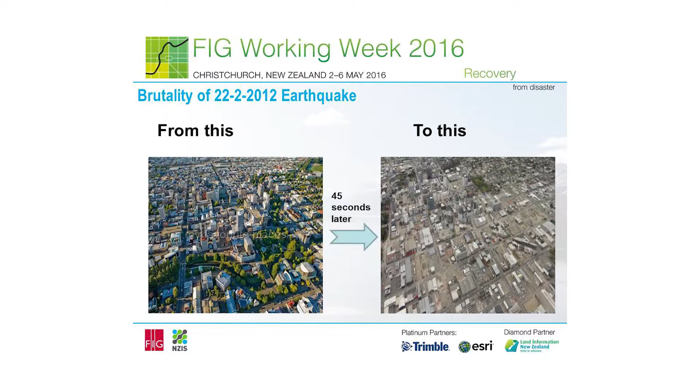So what happened to the services? Working through them in order of importance - water supply pipes. So the map up there, the red dots there illustrate the number of breaks that were recorded around the city immediately after the February 22nd earthquake. We had about 30,000 homes without water supply, which is about 60,000 people the day after the earthquake. So that puts an immediate huge amount of pressure on the response teams, one, to bring back resources, but also to get emergency water supplies out to the public. And that bottom right-hand photo there, you can see some of the queues.

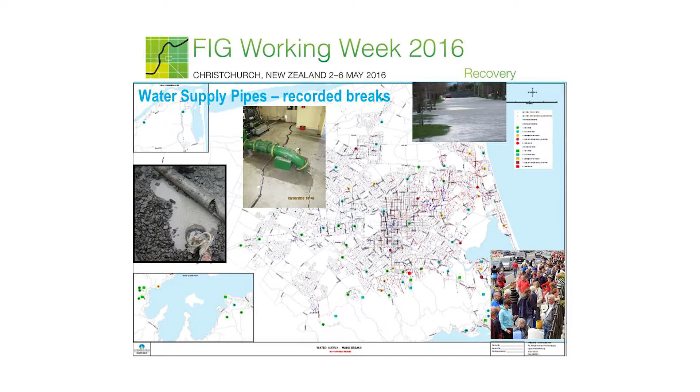Of course, when you have that much damage to the water supply and you've got that much damage to the wastewater supply, you've got big public health risk issues as well. Christchurch is quite unique that its water supply comes from under the ground and it's untreated, and we don't chlorinate, so that's an elevated risk in terms of public health in these conditions. We put immediate water restrictions in place. Not that people were thinking much about watering their gardens, but that was an immediate initiative. And we also looked at bringing a desalination plant in from Australia, particularly the east side of the city. The pressures over here got very low, very close to zero, and we lost some key infrastructure over here. So we looked at, we set up a desalination plant on the beach there as an emergency precaution.

On the wastewater network, damage was worse. Basically, almost half the city had very poor flows in the wastewater network. And this was complicated further because a lot of those areas were in liquefiable soils, and the older pipes pulled apart or cracked, and they filled with liquefaction material - silty type stuff, so you're getting this sort of debris in the pipes. It was very difficult to even tell whether the sewers were flowing or not, so you can't assess the pipe network until you get that stuff out. So one of the first actions was to look at how we were going to get some sort of sanitary service back to about 40,000 homes in the city.

It was interesting that many of the older people in the city were familiar with regimes from the Second World War, like using your garden and digging your own latrines. So there was all sorts of helpful advice coming in during those early response periods.

The city brought in about 2,500 portaloos, distributed into high need areas, but that's not going to service 40,000 homes very well. There are social consequences with these outdoor emergency responses. From the September earthquake we'd had response from social services that kids didn't like, and women didn't like using these at night. You see the best and the worst of humankind during these events, and also portaloos can be a disease transmission path because so many people use them.

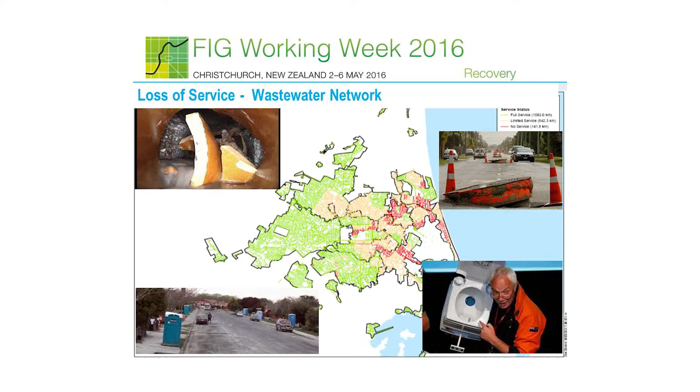So we needed a different type of solution. We ordered 40,000 chemical toilets the day after the earthquake, and 250 storage tanks, and set up a temporary network on the east side of the city. I might add, the mayor there, that's not one that's being used - he wasn't brave enough to do that.

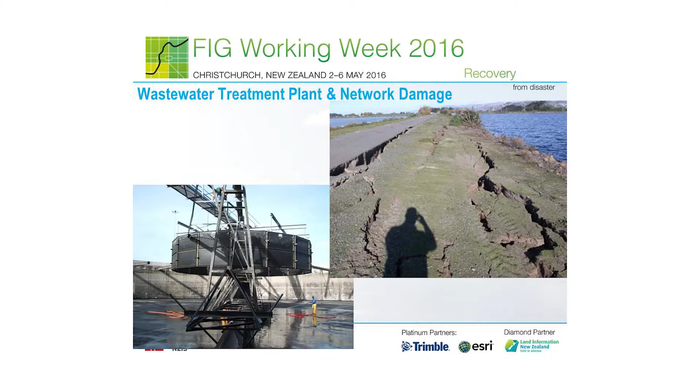The wastewater treatment plant - Greg will talk more about this later - suffered significant damage. It did keep running throughout the earthquakes, though not all processes were running, and that was a godsend for the city. The city had built an ocean outfall discharge which discharged 3 kilometres off the shore, and that came into service just before the earthquakes.

So any wastewater that actually got to the plant was being discharged 3 kilometres off the coast, which helped support public health initiatives to prevent disease transmission. Greg will talk a little bit about the individual damage on the plant.

Wastewater overflows - there are two big spikes here. February 22nd was when the main quake came through, and then we had one a bit smaller in June of the same year. The day after the earthquake, we had next to no wastewater getting to the treatment plant, because of damage to major terminal pump stations.

As soon as they started to come back on, the overflows reduced. But it really took until about October 2012 before we got the wastewater overflow discharges into the environment under control. That was a major achievement in the response and early recovery for the city, because coming into summer it enabled the waterways to be used again for recreational purposes, both the beaches and the rivers.

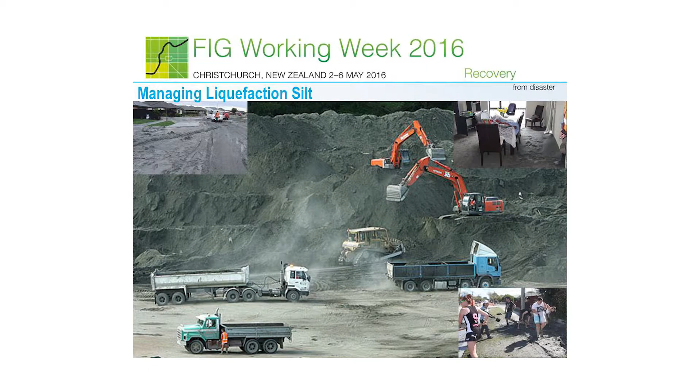That made getting around the city a lot more difficult. It's fair to say that driver behaviour deteriorated significantly after the earthquakes. People are stressed, they're tired, and you've got this ongoing shaking going on, so driver behaviour became quite a health and safety risk for the repair crews, both in setting up traffic management and working in that environment.

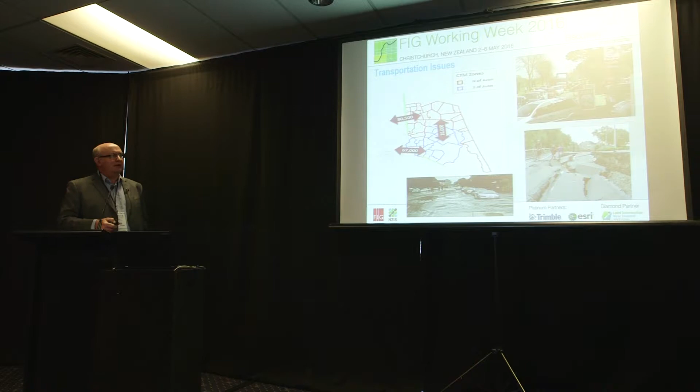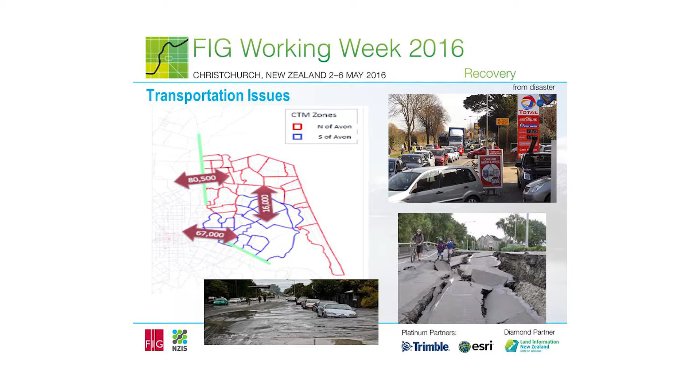So this is the diagram - there's some modelling that the Rebuild Alliance did. We had a lot of damage on a lot of the bridges, some minor, some significant. Some bridges were almost rebuilt. You can't just take down a whole series of bridges in the city at once, so a whole lot of traffic modelling had to be done to assess the impacts of one-laning bridges for repairs, or taking bridges out of service at any time, to see what effect that was going to have on the whole city.

The earthquake - the government red zoned, and by red zone, the government looked at the damaged ground and said, okay, it's not economic to rebuild on this ground. It just needs too much ground improvement work. We're not satisfied that the ground improvement work will give a stable enough solution for people to rebuild on and to put infrastructure back in.

So they bought up about 10,000 properties in the city, and when you translate that to 10,000 families, you've got to put them somewhere. Whilst the city had an urban development strategy that was quite well formed with growth areas marked, the infrastructure wasn't immediately available to those. So at the same time we're trying to respond and recover, we also have to be thinking about where we're going to accelerate infrastructure development to enable new sections to be available for people to build on. This puts a lot of financial pressure on local and central government organisations.

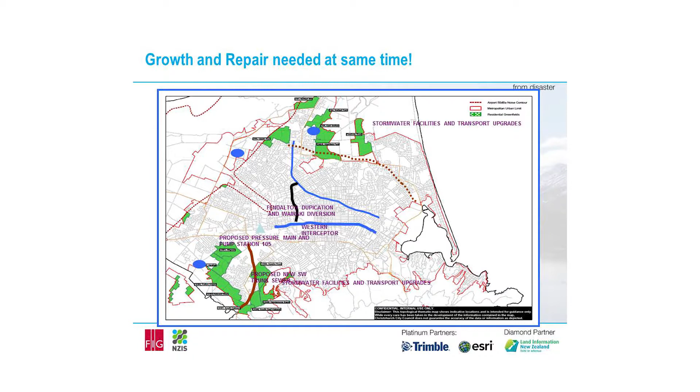During this initial phase, you get swamped with analysts from all sorts of directions giving good advice. Sometimes working remotely and doing desktop calculations isn't terribly helpful to a response and recovery event. So there were some absurd figures that came out with regard to the number of houses that had to be built, the number of people we needed in the city, and it creates a lot of hysteria that was unnecessary. The reality is these things sort of self-determine their own movement, and the commercial parties respond quite strongly to them.

Having some areas already set aside for urban development, with infrastructure plans in place to service them, those areas filled up quite quickly. The emergency areas that the government accelerated approvals through, a lot of those aren't taking off at all, simply because it was 10,000 families having to relocate, not half the city. You don't need to make provision for 50,000 homes if you've only got 10,000 plus normal growth on top of that. So the city, since that period, has been able to slow some of the initial infrastructure investment required, which has been helpful for its finances.

So Duncan Gibb, I think, was a keynote speaker. I worked quite closely with Duncan during the early stages of the recovery, and he would have talked about the alliance infrastructure model that was put in place.

After the February earthquake - so after the September earthquake, the damage estimate across the infrastructure was about 400 million, and the repair at that phase was felt that could be handled through more traditional contracting models, like design and construction type models under a program management framework. That was set up and starting to operate when February hit. When the repair bill went from 400 million to 3.2 billion, there was a realisation that we actually needed to bring the civil engineering and design resources of New Zealand together into one organisation to make that happen. That's really how SCIRT was formed.

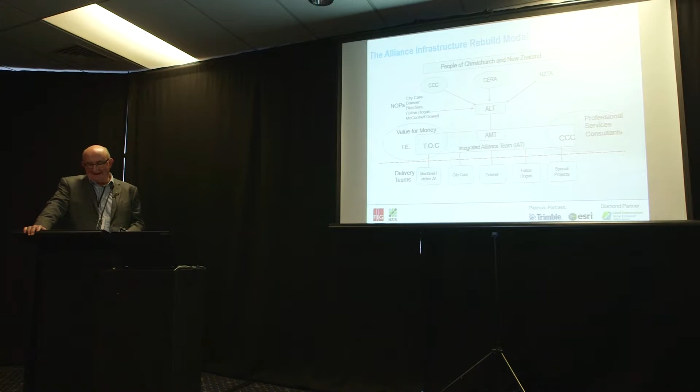You've probably heard a bit about this, so I don't intend to reiterate that - happy to answer any questions. Like all things formed in times of stress and with big budgets, they did a lot of good, but there are certainly lessons to be learned from these models as well.

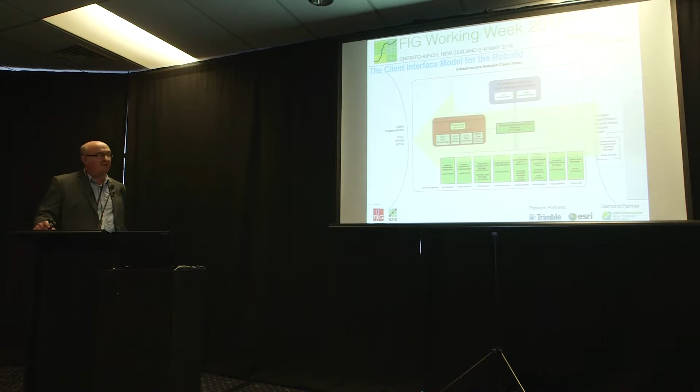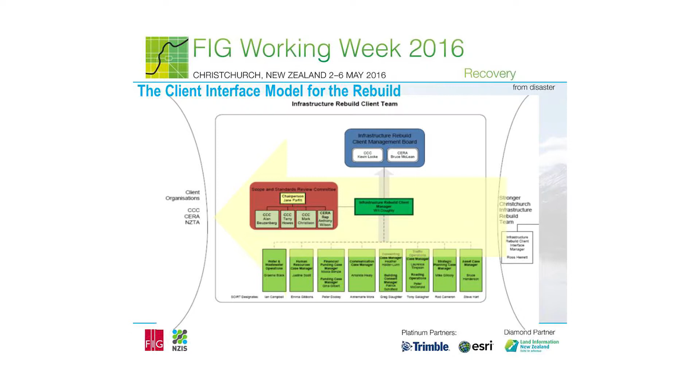To interface with the Alliance, a client interface model was set up, and there were basically three clients: the Christchurch City Council, CERA (Canterbury Earthquake Recovery Authority, which was really central government, now gone out of existence and replaced by other bodies), and New Zealand Transport Agency, a government-funded roading agency. They were the three funders to the model, and Christchurch City had insurance behind its assets as a funding source as well.

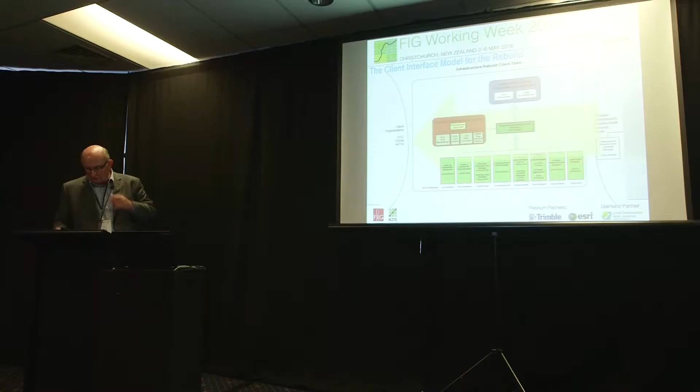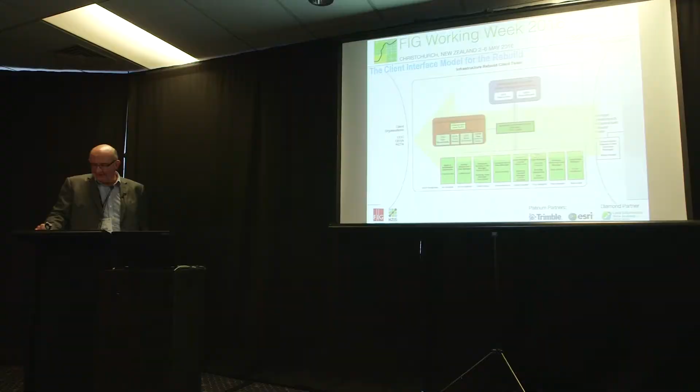We established a client interface team, and one of the main components was the asset management team, or the Integrated Services Team. It was basically a team of asset owners that looked after things like technical standards, approval of projects, looking at payback on projects, application of new technology, and was really one of the key interfaces between the funding authorities and the Alliance.

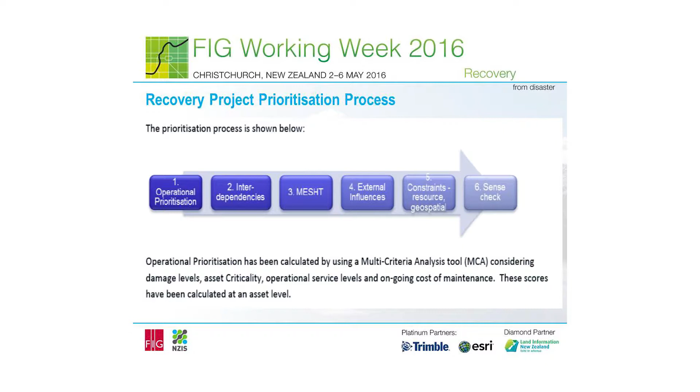In these events, you never get given enough money to do what you'd like to do, or even what's needed, so prioritisation systems are critically important. As part of any resilience or emergency planning, I really recommend people with those roles have a clear think about the prioritisation process they'd apply in those situations, because being able to implement those things straight away helps speed up the recovery process and eliminates a lot of unnecessary discussion.

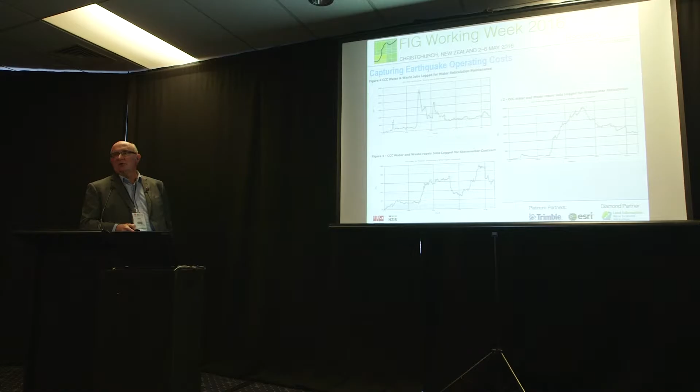So the work concentrates in the water sector initially. The wastewater graph has a longer curve before you get into the work, partly because you have to assess the damage first. Some things are obvious, but until you actually start cleaning out the pipes you can't see what needs to be done, so it's much harder to identify the jobs. Stormwater had some immediate response, and then again it's got a slower tail.

We did quite a lot of ops cost modelling and used quite a bit of cost engineering resource. I'd emphasise the value of doing this stuff as early as you can, even if the information isn't perfect, because it allows you to give your governance structures an indication of the pain to come.

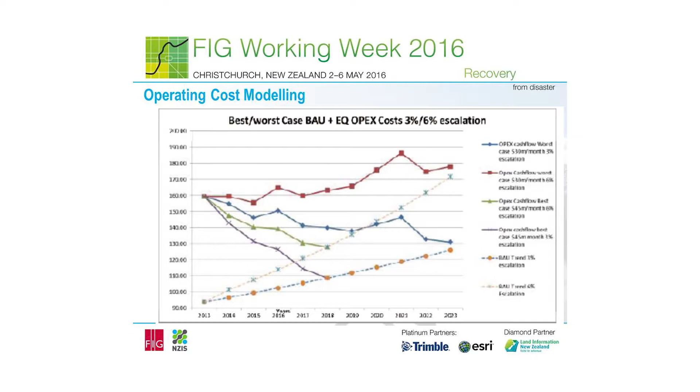There's a number of factors since this was originally done. The government cut back the amount of money that was going into the infrastructure rebuild. There was a series of prioritisation events that changed technical standards and increased the legacy left for the city. But Christchurch City spent about 440 million extra in operating costs since September 2010 just on infrastructure. It's a significant investment, puts significant pressure on the rating environment for the city, and you get nothing for it—well, you get the service.

I think, and this is a personal opinion, but it's a matter of principle and good governance - he who gets left with the legacy should decide how the legacy is created. A lot of the decision making around this was really forced on the council, and its ability to influence how it repaired its network as the recovery progressed was reduced. That's going to cause quite a few problems in managing the asset base over the next 3 or 4 decades.

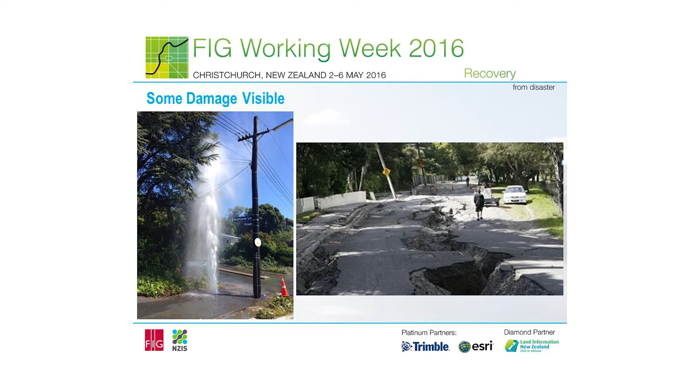So the obvious stuff is the damage that's visible, and Mark mentioned the first response efforts into water supply renewals. They were obvious breaks, often causing big fountains in roads. Those breaks were apparent, they were reported, and they were acted on pretty quickly. Same with roads - there was a lot of make-safe works to get the roads working again and passable, to get silt removed. So that was really the obvious damage that was seen.

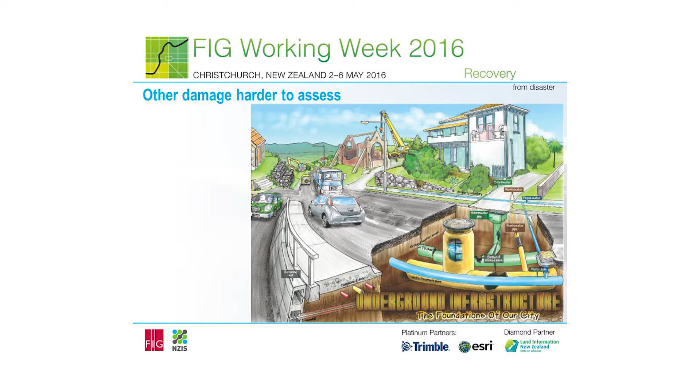Other damage is hard to assess, and Mark also mentioned this delay in responding to the gravity wastewater network and stormwater networks. That was really because a lot of people left town, therefore the networks went under much less pressure. There were breakages downstream as well, which meant that the services weren't in place. So there wasn't a recognition that there was actually a whole lot of damage initially to below ground infrastructure.

So this really brought a focus on this gravity pipe assessment. For SCIRT, this made up over half of the actual rebuild cost, so it was the biggest thing in the rebuild, was about fixing broken gravity pipes. A huge expense, 1,600 kilometres of gravity wastewater, with about 500 kilometres of that damaged, so a substantial portion of the gravity network was damaged and required repair.

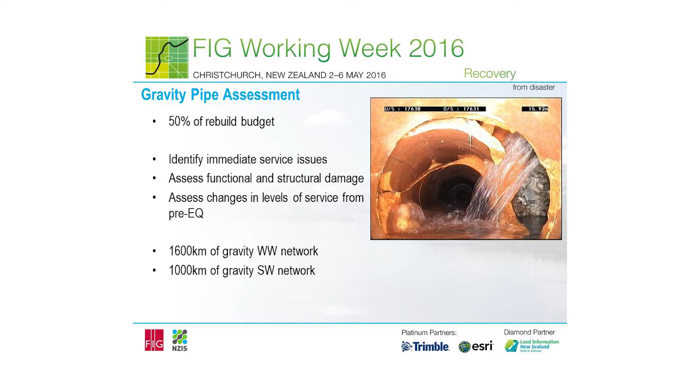There were three elements to that. The first was the immediate service response, getting service back on again and making sure people actually had a wastewater service. The second was doing assessments to check on functional damage and structural damage of the pipes, which was the focus SCIRT had initially. Then as the rebuild matured, there was a greater focus on levels of service, recognising that we were moving into areas that weren't as badly damaged. Could we be more efficient with our rebuild spend and focus on returning service to areas rather than just fixing damage?

In terms of traditional inspection methods, we initially started with the standard methods for functional assessment, and that was survey. We had plenty of surveyors out there doing this. Initially GPS survey across the city, we surveyed every single wastewater manhole, I think there's 50-odd thousand of them.

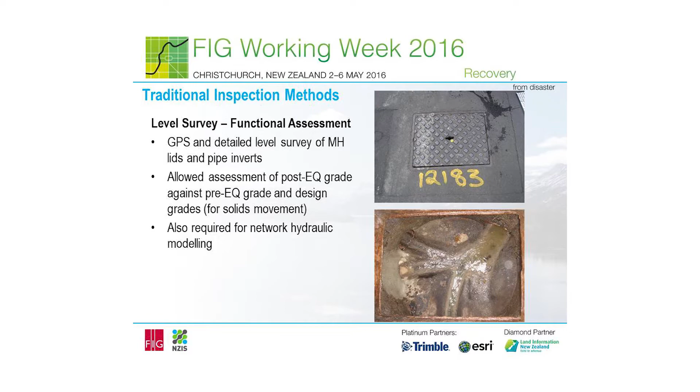And then we followed up with more detailed surveys. The problem we had through the rebuild phase was that we had ongoing earthquakes, and therefore we had to re-establish benchmarks and repeat surveys in some areas where the ground had continued to settle. So that was really a functional assessment of the wastewater network.

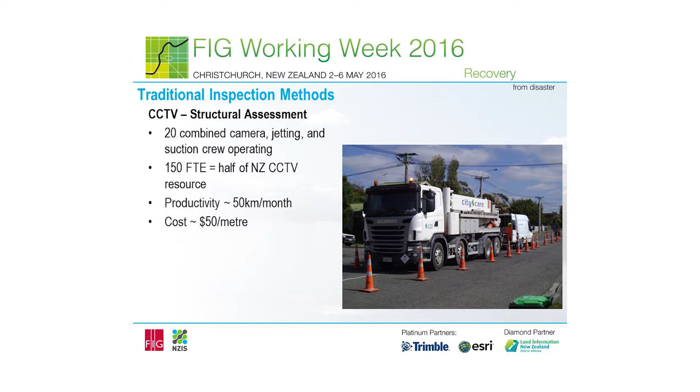The next was the structural assessment, and we did that through CCTV - closed circuit TV inspection, putting little cameras down pipes. It's a traditional way of checking the condition of the pipe, but for Christchurch it became very expensive. It took a lot of resources - about half of the nation's CCTV resource was in Christchurch doing this, and probably about 5 times the cost it normally would, because of the amount of silt in these pipes and the high groundwater table and high flows we had to deal with.

So that caused a problem for us in that we couldn't get enough inspection done at a rate that fed the rebuild. SCIRT had a mandate to get the city back up and running again within 5 years, and that meant we had to start spending money at quite a rate on physical repairs. So the challenge for us was, given the limitations around how fast we could assess damage, what other things could we do to assess damage that were non-traditional?

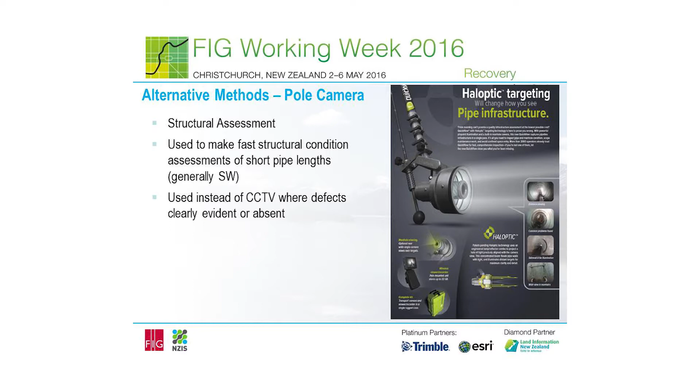And so we started to investigate some other methods of assessment. The first was pole cameras. That seems pretty simple, but basically putting cameras on the end of poles and using that as a way to do a quick and dirty assessment of problem areas. That became the routine way of assessing damage in stormwater pipes, where the assets were typically quite short and the pipe size quite large. So pole camera was a good tool.

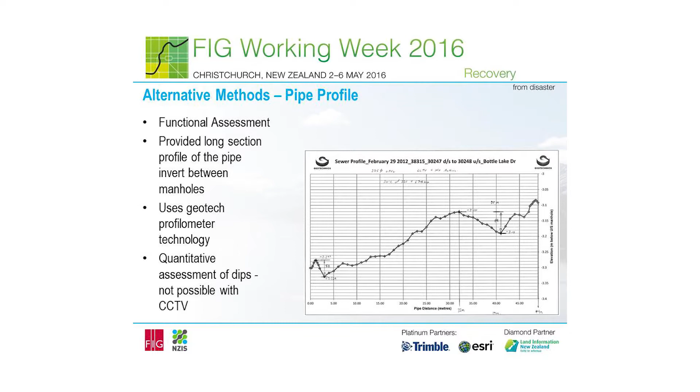We developed a method for assessing the profile of the pipes, so that's how the grade of pipes varied between manholes. That wasn't information you could readily collect from CCTV because of the nature of the damage. This was a technology we worked with a local contractor who was familiar with doing geotech investigations, and we applied that to our pipe assessment, which was a useful way to check the functional condition of pipes.

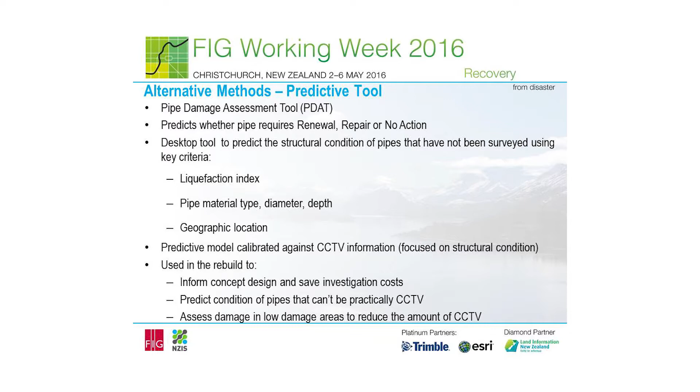And then we developed also a predictive tool. We developed a model, a desktop model that pulled together different factors that can influence damage, and used that tool to predict where damage would occur. This was a way to really focus our inspection effort and to not spend a lot of money on inspection where it was very clear the modelling could show us that the damage was such that the pipe required renewal. So rather than spending enormous amounts of money actually determining that, we were able to rely on the tool to tell us there was a good chance the pipe was damaged beyond repair and therefore required renewal. We called that our PDAT, or our Pipe Damage Assessment Tool.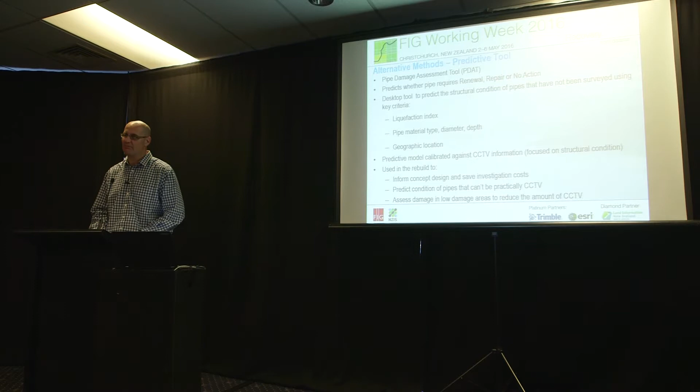That allowed us to do a sample of CCTV across the city and then produce predictions of overall damage across the city. That really led to us being able to forecast where we're heading with the rebuild from a cost point of view, and it meant we could focus our efforts on areas that were likely to be more damaged.

So this is a plot of damage. It's similar to what Mark had around service, actually, as it happens, but really focused on the central area. This is structural damage.

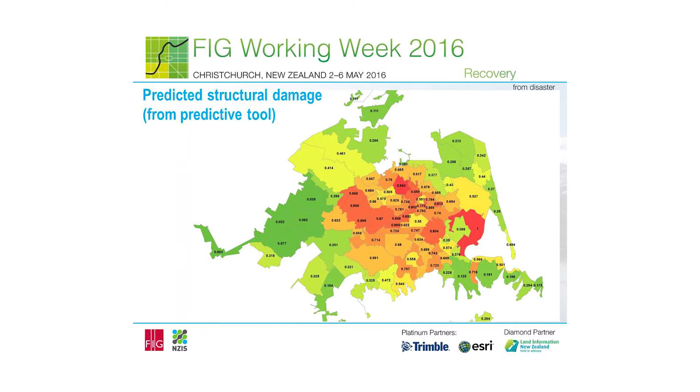There was additional functional damage in the western and eastern parts of the city, out towards the sea. Out here, even though the pipes were quite new, the differential settlement and grade changes meant these pipes were also, from a functional point of view, very damaged. Whereas the main structural damage occurred around the older earthenware pipes within the main CBD area.

And then, through a sample of CCTV and using our model, we were able to predict what the damage was like in other areas.

As I mentioned, we moved through the rebuild phase from a focus on repairing damage where we found it to a focus on returning levels of service. We were limited by our rebuild budget - we couldn't afford to fix all the damage, so there's lots of damage that still exists in the network out there. So the focus of our rebuild, from an inspection point of view, was really on measuring network performance and then targeting our rebuild effort to return levels of service.

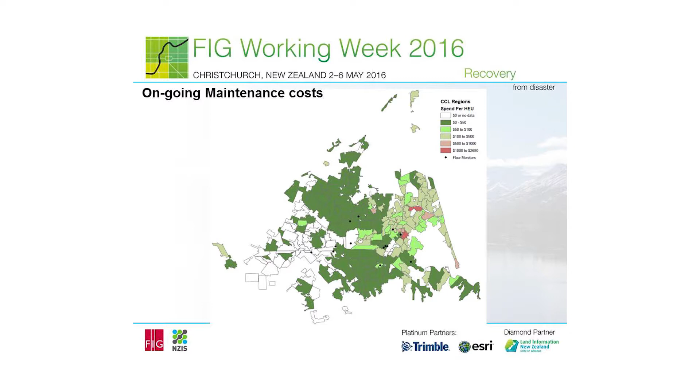So these are some information we pulled together. This is public lateral maintenance - how much effort was going in by the maintenance contractor to repair laterals, those pipes that run from the house to the street. This is overall maintenance costs. Again, high maintenance costs in the eastern part of the city.

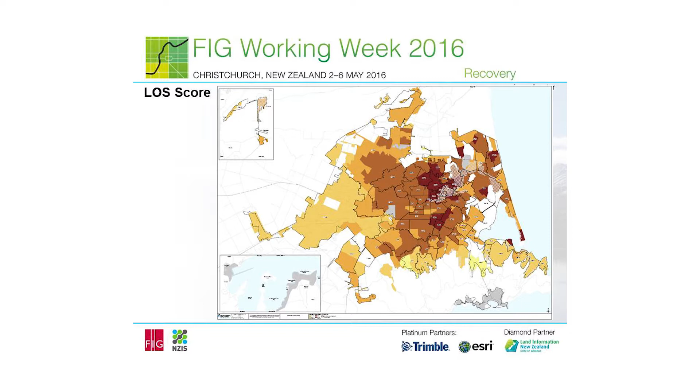Infiltration, I&I, is where flows were substantially higher. We looked at that information and pulled it together into a level of service score. So we used multi-criteria to develop a risk map, basically, that focused our efforts on rebuild.

So, lessons from this process. I think we invested heavily in GIS, and that became our main tool for both storing our data and being able to communicate that and make it available to designers, to asset owners, to contractors. So GIS has been a big part of it, and will continue to be a big part of the city's ongoing management of their assets.

We put a big focus on - and I think having a greater focus, probably for future events - on levels of service, knowing how your network operates current day, so that when you have an event, you can benchmark that and see what's happened.

Data management systems were important. The amount of data involved in cameraing pipes is huge - every file was 300 megabytes, so it's a massive amount of data. Being able to manage that data in a cost-effective way is pretty important, so having some foresight about how you manage lots of data is pretty key.

Having skilled workforces - we found that when we started our CCTV effort, the quality of the results we were relying on was very variable. So SCIRT had to implement a whole training regime through their workforce to get everyone up to the same level of inspection, so we could rely on that data for our design. If we hadn't done that, the data coming in wouldn't have been any good to us, and our decisions around rebuild would have been pretty hopeless. So maintaining a skilled workforce is essential, for both condition assessment and rebuild.

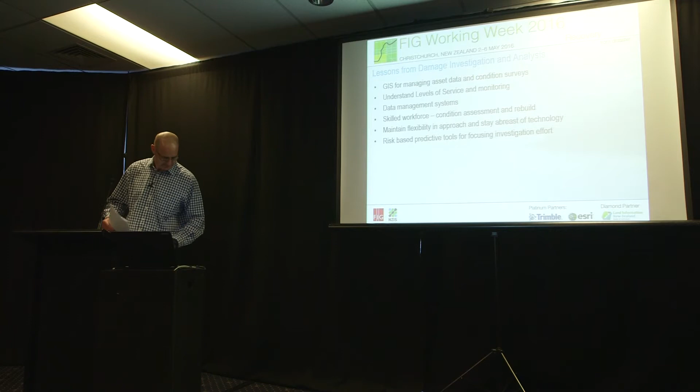I'm going to briefly recap the main bits of damage to our horizontal infrastructure, then work through how we investigated and came up with our design solutions, and go through some specific design elements we came up with.

As Mark and Dave illustrated, there was severe damage to the city's infrastructure. Some of the main ones would probably be pipe breaks, lateral spread, buoyancy uplift, differential settlement, and rotation of the pipes.

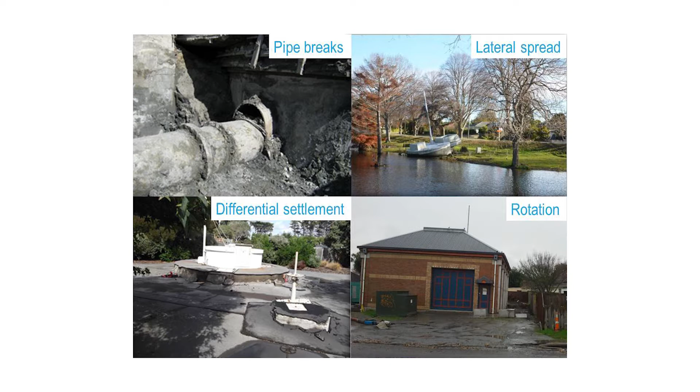In addition, there was severe land movement as well. Areas of the Port Hills had about half a metre of tectonic uplift, and areas around the Avon River experienced about 1 metre of subsidence, which has severe implications for what were gravity networks.

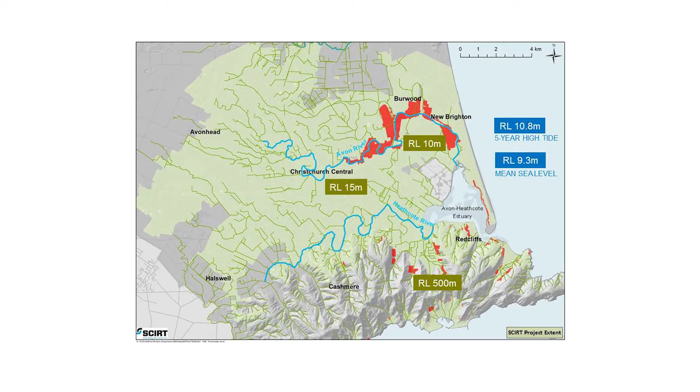To put that in perspective, this is Christchurch. Most of our stormwater system drains via gravity into the Avon and Heathcote rivers or to the estuary. That's complex because Christchurch is relatively flat and low-lying. In the west we've got a reduced level of about 15 metres, down below 10 metres in the east. A mean sea level is 9.3 and a 5-year high tide is 10.8, so we've immediately got an issue for gravity drainage.

Before the earthquakes, normally in our stormwater system the rain would come down our gutters and along our land, then be taken by our primary system through curb and channel, sumps, pipes, open channel swales, and some pump stations to discharge. We also relied on a secondary system, which was overland flow over roads and reserves.

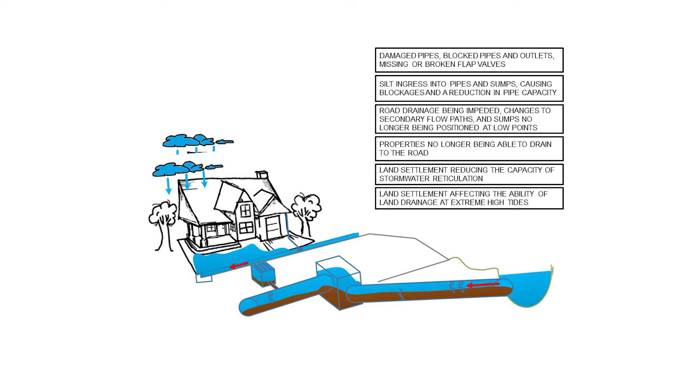After the earthquakes, basically, this happened. The main challenges were broken and damaged pipes, silt ingress into those pipes causing blockages and reduced capacity, road drainage being impeded, sumps no longer at the low points, and our secondary flow paths all disrupted or going in different directions. Then we had land settlement.

Some properties were now lower than the road, which they used to be able to drain to. Entire areas were now lower in relation to the tide and could no longer drain via gravity, and any settlement was reducing the capacity of our gravity stormwater system.

So how did we go about repairing our networks? As Mark went through, firstly there were emergency repairs, and then SCIRT set up. SCIRT worked to first do the asset assessment to understand the impact on our systems, then determine the criticality of that damage on our level of service of the network, and then we went in and designed the repair or renewal of those assets.

It's worth noting there were other organisations doing other work as well. Council's Land Drainage Recovery Program was looking at land drainage at a larger catchment level, looking at land use, open channels, rivers and non-horizontal infrastructure that SCIRT wasn't looking at. And as Mark mentioned, CCC's normal capital programs were ongoing - the city wasn't standing still, we still had ongoing works.

So it was really important that we shared our knowledge and shared the data and information we were gathering. We collected a whole lot of information, and once obtained, displayed it all in the SCIRT GIS viewer, which was a way for us to, in a very accessible way, spatially show all of our information.

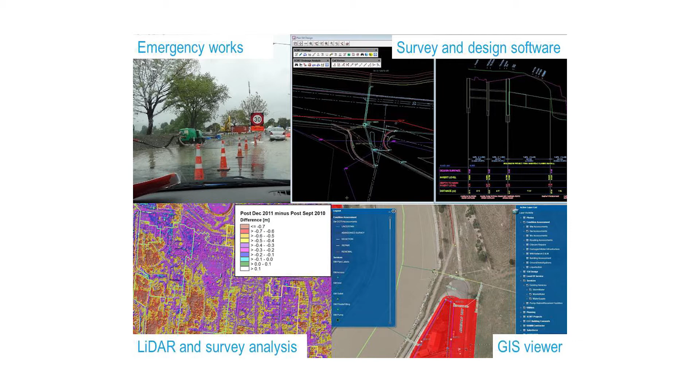Once we started getting into all the work, another really important thing was the creation of guidelines and standards. SCIRT and the council worked together on these, and they're ongoing information sources continuously getting updated as we learn more. It sets the standard for survey, hydraulic modelling, damage assessment, and all of our specific design features that we've come up with. Another important thing to facilitate coordination and efficient working was the use of similar software.

So we had our GIS viewer, pipe damage assessment information was stored in Infonet, design information and survey information was in 12D, and we created an asset assessment spreadsheet which linked all of these different data sources within SCIRT. These systems are still being developed.

I was at a SCIRT meeting three weeks ago, and the IT department stepped up and introduced us to an app they've made for smartphones so that contractors and surveyors can step out on site and pick up as-built information in the field, uploading it straight into the council's asset database for verification. It makes the whole process quicker and more efficient, and it's so much easier to record information when you're standing right in front of the source. It's really cool to see these tools still being created.

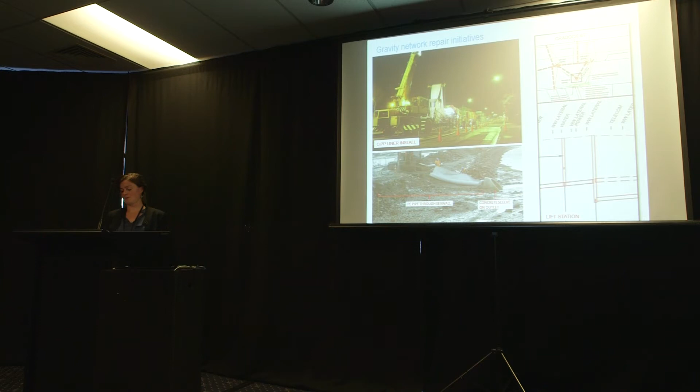Then, when looking at the pipe network itself, SCIRT started steepening up pipe grades. We used what we call the tractive force method, which instead of just setting a minimum grade for your pipe, works to ensure we're achieving minimum shear forces that keep the wastewater flowing down the pipe.

This meant that in places we were forming sub-catchments in our network, and we needed new pumping stations. Again, SCIRT pioneered a new lift station design which, instead of installing a brand new pump station at the site, simply uses a small proprietary pump to lift the sewage back up into a higher pipeline.

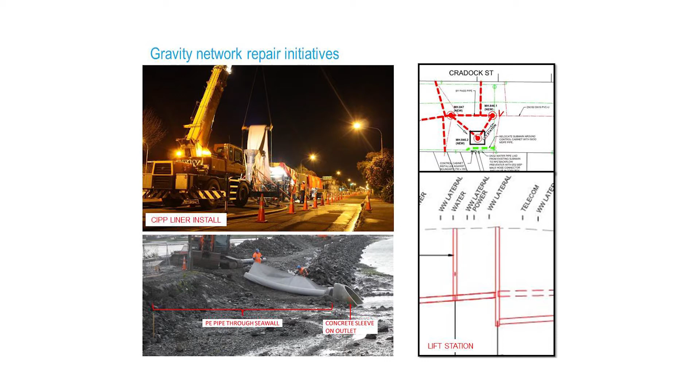There are a few other easy quick wins. Reducing the depth of sewers where we can means they're more easily repairable in the future. And in places we started using collector sewers alongside the main trunks just to keep that pipeline higher.

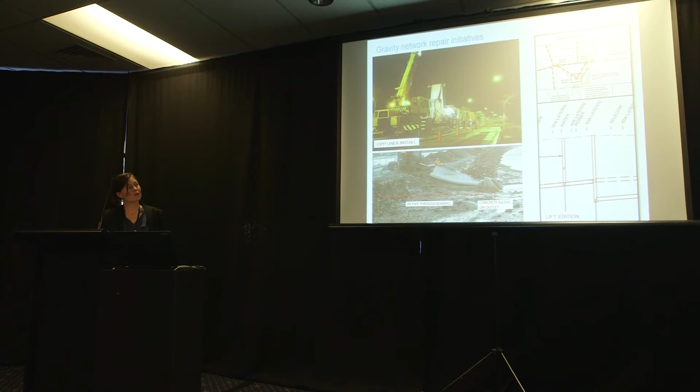We also investigated alternative systems to gravity, and to justify that we did a lot of multi-criteria analysis, net present value calculations, and a lot of community consultation. Coming out of that, around 10,000 pressure units have been installed into Christchurch and about 4,000 vacuum sewer units.

Now, pump stations. We had four main things related to four main damage types that we wanted to incorporate into pump station design.

We want to improve slope stability and reduce lateral spreading. We want to limit differential settlement. We want to limit buoyancy uplift. And we want to make the entire pump station structure - its valve chambers and its inlet and outlet pipes - one compatible system to stop pipe breaks, shears, and discontinuation of services at the interfaces.

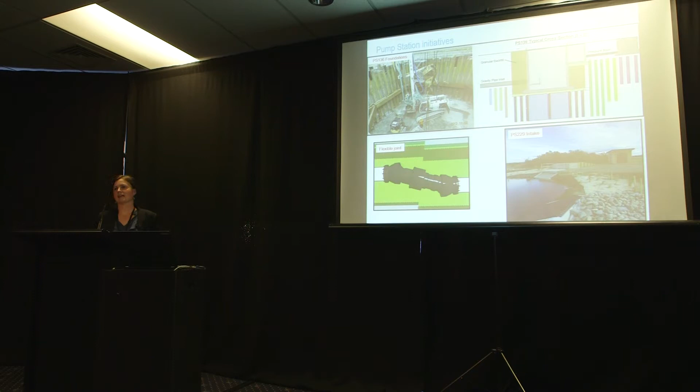So the key considerations to do this were firstly, site location - sometimes we didn't have a choice, but if you could pick a more stable ground site, that's a good start. Then ground improvement or piles, both beneath the pump station, around it, and around those critical inlet and outlet pipes. We also tried to have consistency in the foundation and performance of our ground improvement.

For buoyancy, a couple of extra things: you have to relieve pore water pressures, which are always a problem but become more so during a liquefaction event. You can install tension piles or anchors to help with that, and you can also add extra weight to your structure or have an extended base just to keep those structures on the ground.

And then for keeping the entire site compatible, other simple things we could do, like over-sizing inlet gravity pipes, using flexible pipe materials or flexible pipe connections, and providing slack in any service connections so that they can move a bit.

We're also thinking of our site layout, making access and maintenance easy because of the layout, keeping things shallow so that it's easier to dig down to, and considering how, if another serious event does happen, how can we re-level, how can we fix things?

So as a couple of examples, I've got a couple of photos up there of pump station 136, which is a new pump station in the east. It takes about 1/6 of the city's sewage. You can see here the foundations and the ground improvements underneath that station.

So it used continuous flight auger columns of about 20 MPa concrete that was installed beneath and around the pump station. These limit the liquefaction, and there's also a flange base on that pump station and granular backfill to provide lateral support and resist buoyancy uplift.

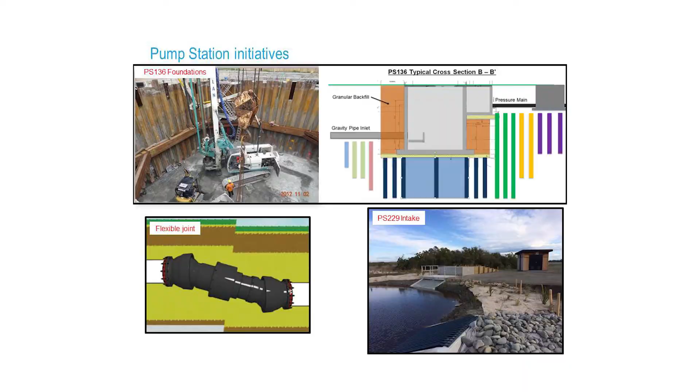So if the ground settles, you want the pump station to settle as well. So that rules out ground improvement or piles in this case. Here, the pump station was founded on a gravel raft, and that will resist buoyancy uplift and any differential settlement, and hopefully it will allow that pump station to settle with the earth if that happens.

Here it was also really important to keep the whole thing shallow to resist that buoyancy uplift and to make future repairs on the pipe or the pump station easier.

So I guess my few conclusions were: it was really important right from the start, the efficient asset assessment was really key, just to know what we were dealing with, know what we had to design for. And then coming up with those guidance documents and standard details made the simple stuff easy for us and improved our collective quality of work.

But always on every single design we had to be thinking, for this specific design, how can I get value into our repairs and renewals? How can I make this design resilient? What's special about this one?

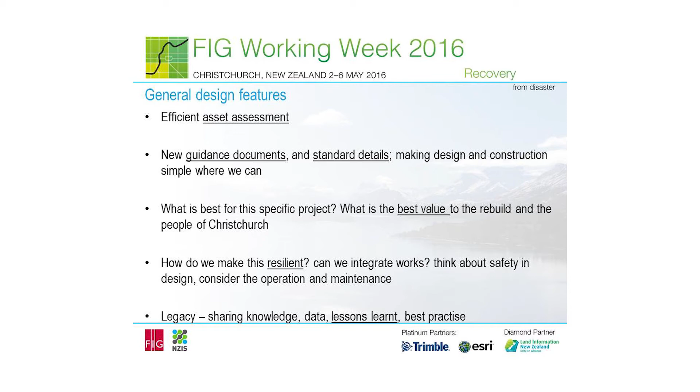And then finally, we needed to share all these lessons learnt, both amongst ourselves and everyone else, so that we know why we designed things the way we did. And now I'll hand you over to Greg.

Thanks, Amber. Okay, you've heard about the network, you've heard about the stormwater, you've heard about the wastewater, and all the work that was done extensively for a period of time after the earthquake.

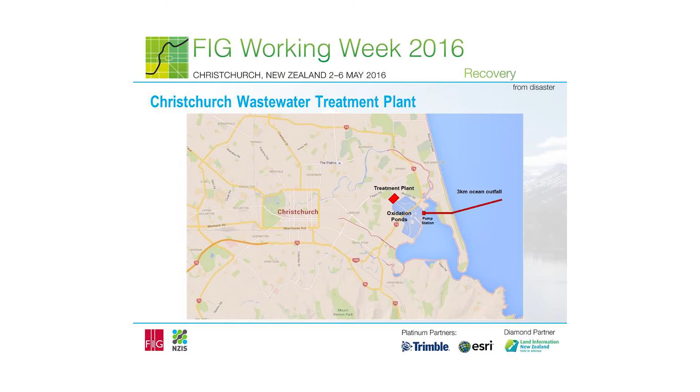So I'm just going to give you a few highlights about the wastewater treatment plant. There's only one wastewater treatment plant in Christchurch, and it's treating the flow from the whole city, so that's about 250,000 cubic metres of wastewater a day for a population of about 360,000 people. So obviously it was crucial that plant was brought back online after the earthquakes as quickly as possible.

The treatment plant really has three main components. There's the treatment plant itself, there's a 220 hectare area of oxidation ponds, and then there's an ocean outfall with a big pump station. So there are really three main components, and some of the issues around resilience and how resilient the plant was are linked to the fact that there were three different parts and we could rely on those different parts at different times.

Okay, a bit of background. We've talked about liquefaction quite a bit, but I thought we could break it down to the basics to help get an understanding of it, because it was particularly important at the treatment plant site. So because the plant is in a coastal location, it is built on deep sands and with very shallow groundwater. So those two things in combination make it highly vulnerable to liquefaction.

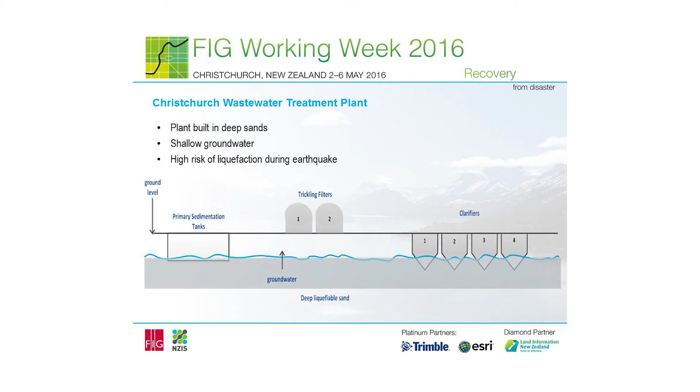What happens in a liquefaction event is, with that force being applied, the soil is liquefied, and when it's liquefied, the weight of the soil sitting on the groundwater creates these tremendous pore pressures underneath the ground, and that's what causes the damage. The interesting thing for us at the treatment plant was some of the assets are built on top of the ground, other ones are built below the ground.

So the damage profile we experienced at the treatment plant was strongly related to the height of those assets and whether the bottom of the asset was below the groundwater level or not.

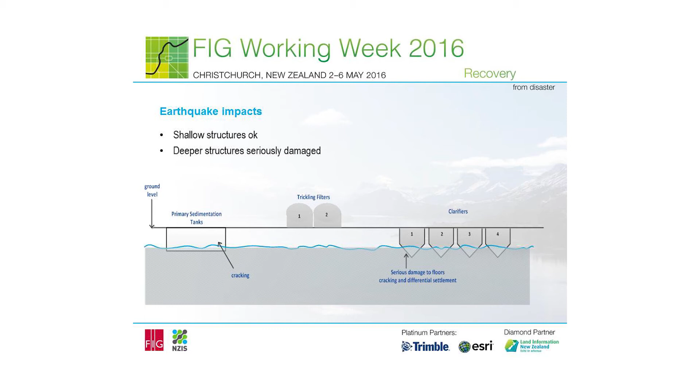I mentioned that the impact had to do with different structures. Deeper structures had much more serious damage, lighter, higher structures had less damage, and things sitting on top of the ground were still damaged, but generally to a much lesser extent.

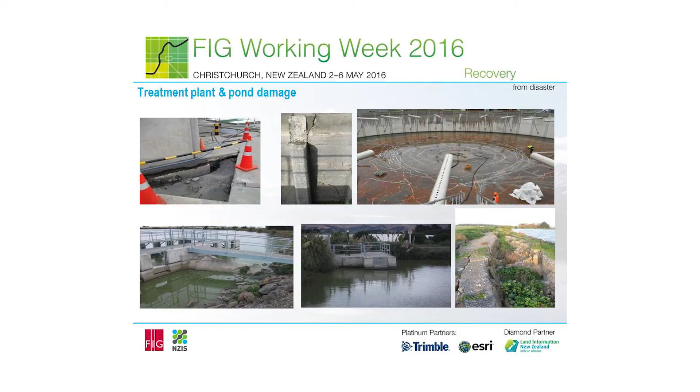These are very large buried concrete structures with concrete floors that were severely damaged. And on the oxidation ponds, those lower photographs, these oxidation ponds have extensive earth embankments.

What happens to an embankment if you get liquefaction underneath it is the support structure for the embankment basically ceases to function and the whole thing spreads out and settles. So you get a lot of change in height, and that creates a problem for the embankment as a water storage device, and you get lateral spreading, as Amber mentioned, all this cracking, and the whole thing starts to fall apart.

Where you've got civil structures built into those embankments, they get quite seriously damaged because of the massive amount of movement going on. The ground and the embankment are pulling a pipe down if it's attached to a structure in the pond that wants to go up. So you get all sorts of untoward differential movements.

So what happened after the earthquakes? In the initial week or so, the plant actually received very little load. The wastewater network was so severely damaged, and also the power was off. Because all of the wastewater is pumped to the plant, no power means no flow, nothing arrived.

So there was damage, and I think there was the beginning of repairs, but really the worst of the problems were yet to come when the network came back on.

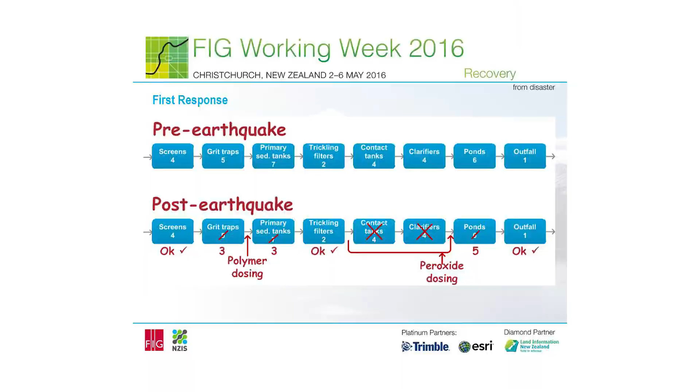That top section shows that we had multiple stages in the process. Before the earthquake and after the earthquake, we had levels of damage within individual process units which took those units out. But because of the flexibility of the plant and the opportunity to share those loads to different unit operations, we could adapt and get the plant back up and running fairly quickly.

Okay, sand. So you saw the pictures of that sand mountain, and the network is built in sand, and with all that damage, cracks in pipes, huge amounts of sand got into the network. It really only started arriving at the plant when the network came back online, probably starting a week after that 22nd of February earthquake. We're talking about massive quantities of sand being pumped to the treatment plant over a period of months, thousands of cubic metres.

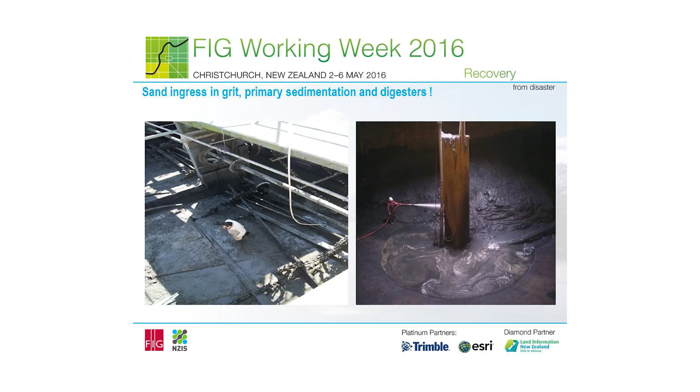That photograph on the right shows a guy cleaning out a digester. The total volume of the digester is 5,000 cubic metres, and we removed 4,800 cubic metres of sand from it. These tanks were literally filled up to the top, and once you've got a digester full of sand, it's a major exercise to clean it out.

Trickling filters, so I talked a bit about this. The trickling filters had shallow foundations. They kept on operating continuously throughout the earthquake sequence, and that was great because they became the core of the treatment process.

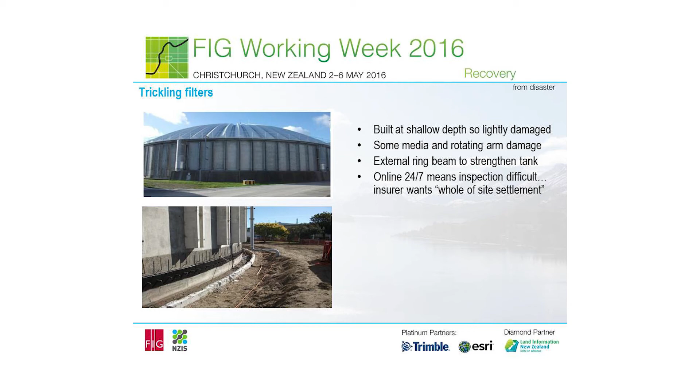Ultimately that became a problem though, because for insurance assessments you have to take these assets offline, get inside them and do a whole lot of assessment work, and that was difficult to do because the plant was totally reliant on them maintaining operation 24/7.

Clarifiers, so downstream of the trickling filters we've got these clarifiers. What they do is separate out the solids from the treated wastewater before it's discharged to the oxidation ponds, and these were seriously damaged for the reason that I explained.

It's all about liquefaction. You get these tremendous pore pressures under the floor. What happened was the whole floor just popped up. The worst case scenario, we had about 900 millimetres of uplift in the concrete, so we had to build extensive new heavily reinforced concrete floors inside these structures.

There's a lot of survey work involved in that because the water flows through the clarifiers by gravity, so all the levels had to be very accurately re-established.

Amber talked about cure-in-place liners, so we're using similar techniques at the treatment plant as necessary for buried assets that can't easily be removed, to put liners in large bore concrete pipes that were damaged.

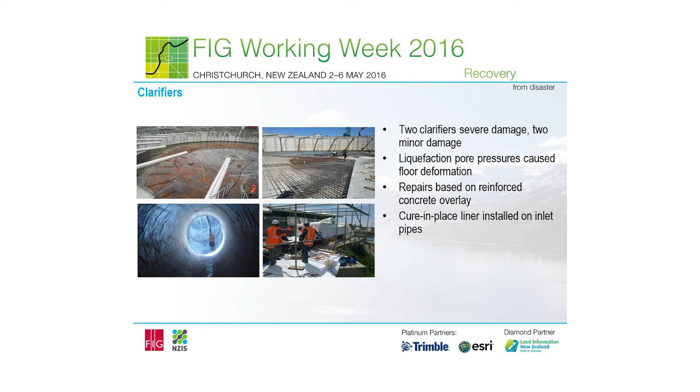So what were the lessons learned? Just a couple of things.

The first one is about flexibility. If you're designing an infrastructure asset, you need to do critical analysis around which are the critical parts and what are you going to do in a major incident like an earthquake. We were very lucky at Christchurch Wastewater Treatment Plant because there are multiple stages in the process, and within each stage there's also quite a lot of redundancy. So even with partial loss of service in some parts, the whole of the plant continued to operate at a level.

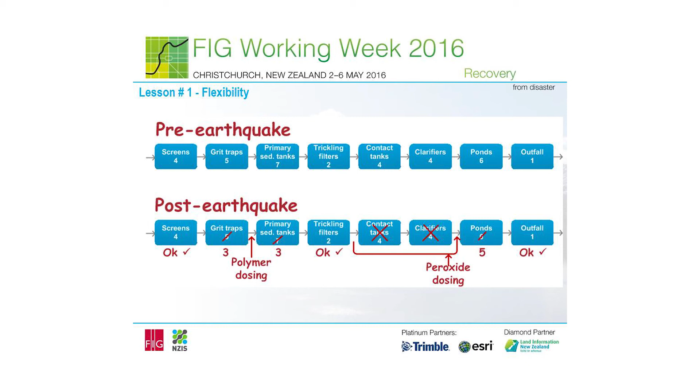Another theme, layers of protection. Mark talked about public health risk. You've got the network, and the idea is to take away that wastewater and treat it to maintain public health. We did not have any serious disease outbreak in Christchurch City after the earthquakes, and one factor in that was these layers of protection. So even with minimal treatment being provided at the treatment plant, you've got another level of protection in the oxidation ponds, and then you've got another level of protection through this outfall, which is pumping the wastewater out to sea. So layers or levels of protection.

Third item is about risk management. It's hard to conceive of all of the adverse scenarios that might arise when you're designing an asset, particularly if it's a very low probability but high consequence event, and engineers are put in situations where budgets are constrained. So you need a rigorous approach to designing critical infrastructure assets which takes account of these risks, because once they're built, it's very, very hard to retrofit earthquake resilience.

And the last one really is around insurance, which we haven't talked about. I doubt that the people at the council had read the fine print of their insurance policies much before the earthquakes, but I can tell you they started reading it the day afterwards.

Insurance resolution has been a very long, complicated process, and I think we've learned a lot. You have to assume a litigious approach for everything from day one, and there's a whole lot of things you need to do beforehand. It's critical to have a very good understanding of the asset condition before an event, because what will tend to happen is there'll be arguments around if there are cracks in a structure - an assessor will say that they were existing before the earthquake, and you get these types of arguments all the time. So having good understanding of the asset prior is crucial.